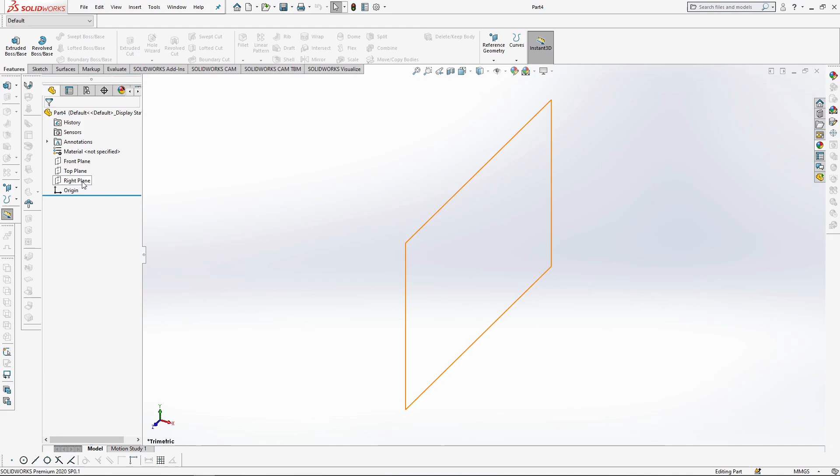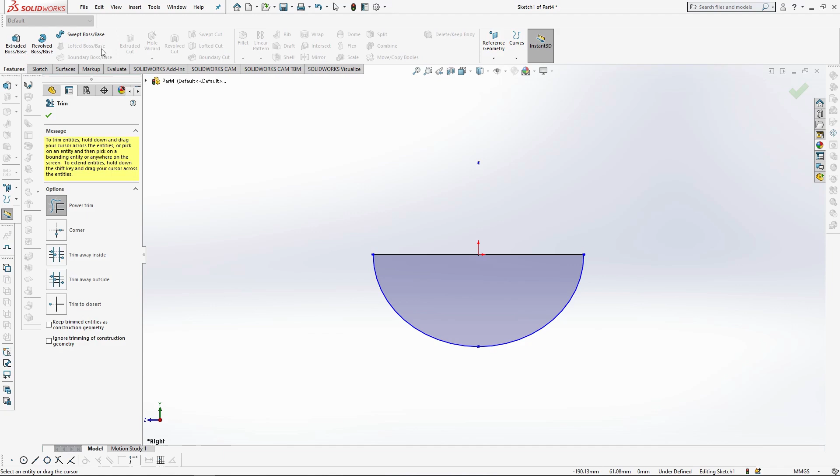To begin, start a new part. Sketching onto the right plane, use the ellipse and starting from the centre axis, draw a level ellipse. Make it wider than tall and change the dimensions to 60mm radius width and 52mm radius height. Half the ellipse horizontally with the line tool and trim away the other half with trim entities. Revolve the shape 360 degrees.

To start the leg, add a new plane off the front plane. Change the distance to 25mm and flip the direction. Flip the normal to here so that the plane faces outwards.

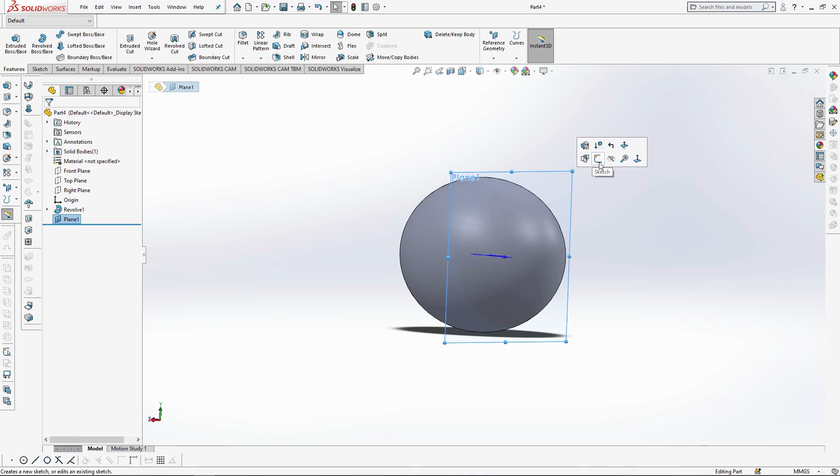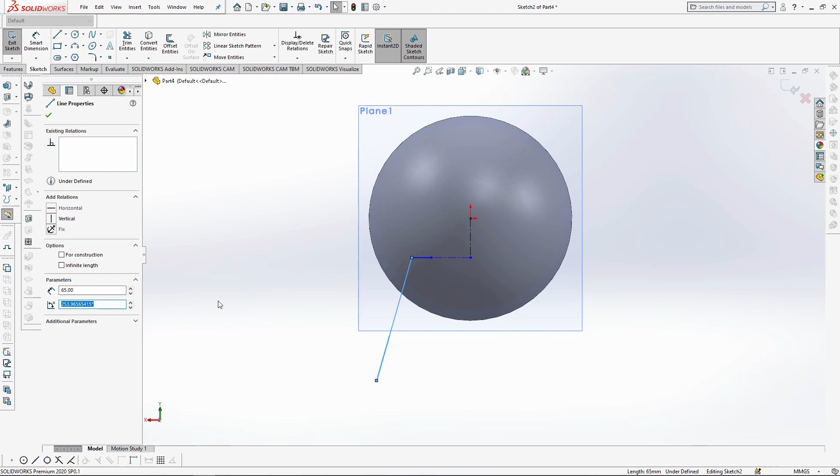Sketching onto the new plane, use the centre line to create some guides. Draw a line downwards from the axis by 20mm, then outwards here by 30. Using the line tool, draw a 10mm line back inwards along the guide. Then draw another line from the end of the guide, down and out diagonally by 65mm. Change the angle of the line to 255 degrees and close the sketch.

Select on the top plane, reference geometry and plane. Select this point from the sketch for the second reference and add a new plane.

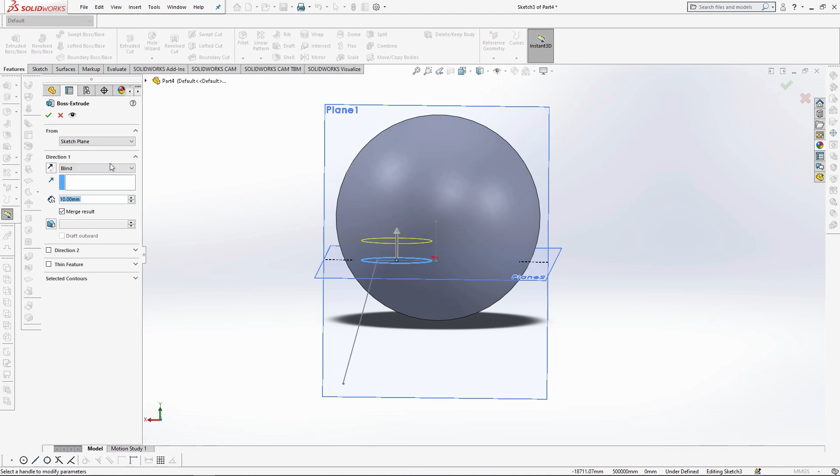Sketching onto the new plane, draw a 36mm circle from the end point of this line. Then use Boss-Extrude, change the extrude type to up to vertex and select the end point of the leg guide sketch. Select the diagonal line for the direction of the extrude. Before closing, untick Merge Result.

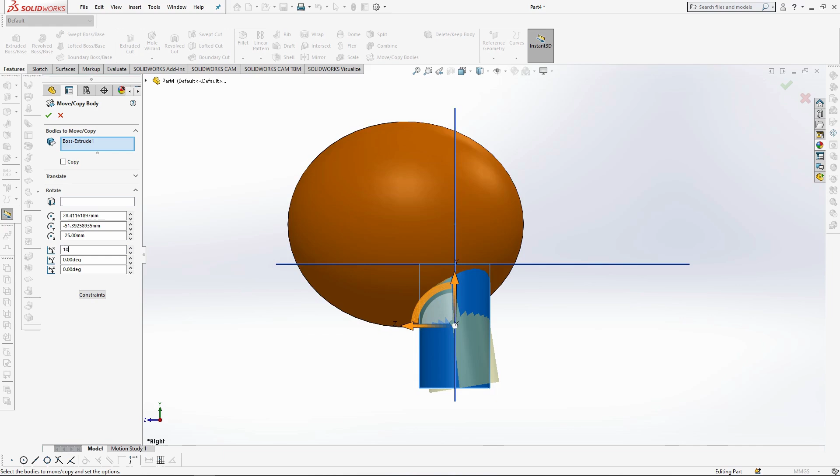Looking from the right side view, use Move/Copy Bodies. When the options open, untick the copy box and rotate the leg along the x-axis by 10 degrees, and OK it. Sketching onto the right plane, draw a rectangle from the highest point of the extruded leg here, across.

Extrude cut this away to make the leg level again. Then fillet the bottom edge by 4mm to soften it. Now you can mirror the leg using Mirror in Features.

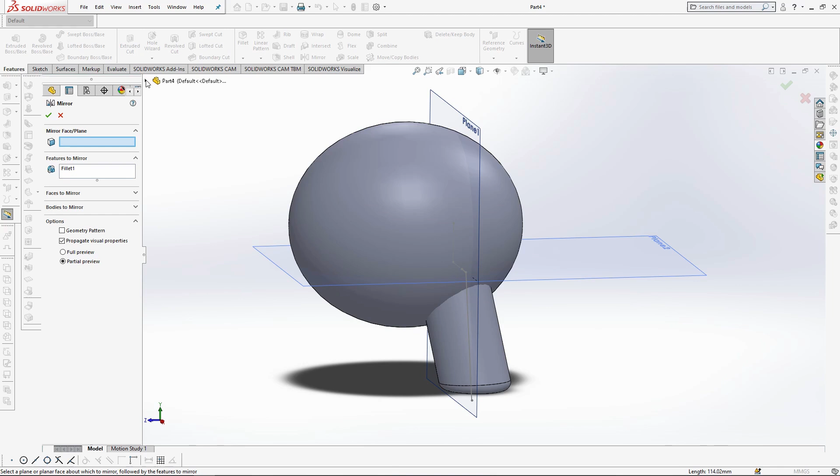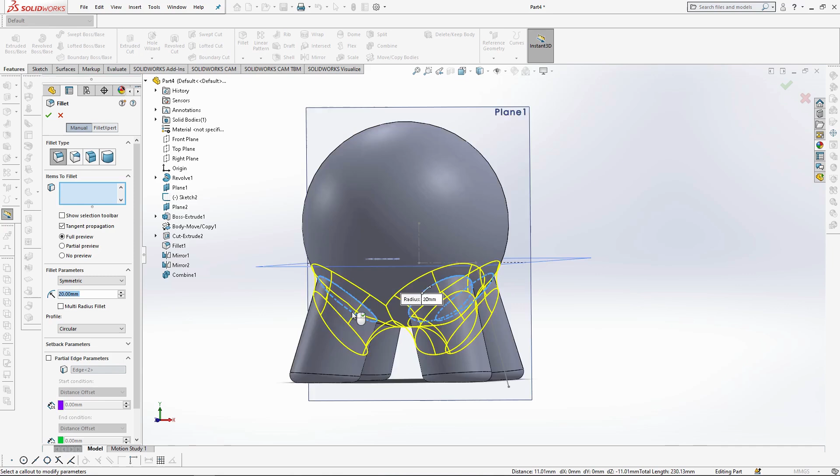Mirroring it from the front plane, ensuring to select the bodies under Bodies to Mirror, not Features. Then mirror both legs along the right plane so that you're left with 4. Using the Combine tool, ensure Operation Type is on Add and select all the bodies, combining them into one. Soften the join of the legs of the body, filleting all 4 edges by 20mm so it looks like this.

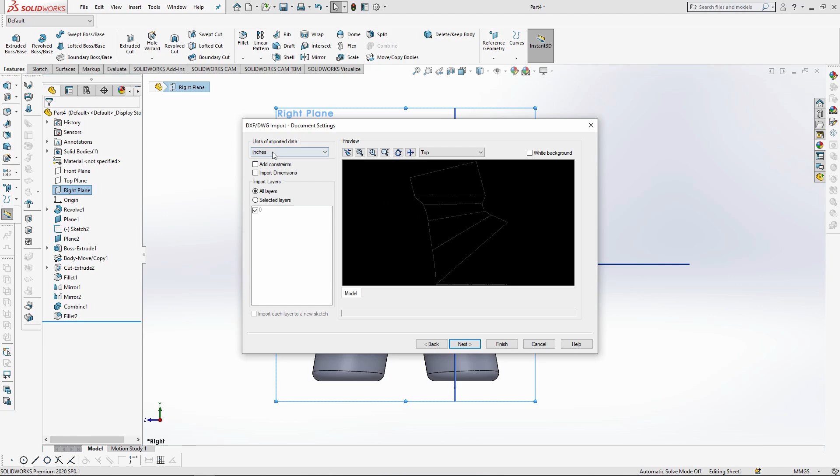To start the neck and the head of the piñata, select the right plane and go to Insert DXF/DWG, browse and open the Piñata Neck Guide DXF. When the options box opens, untick Import as Reference and click Next. Here you'll have a preview of the DXF. Change the dimensions to millimeters and click Finish to bring it in.

Using Move Entities, move the sketch from this end guide point to the centre axis and close the sketch.

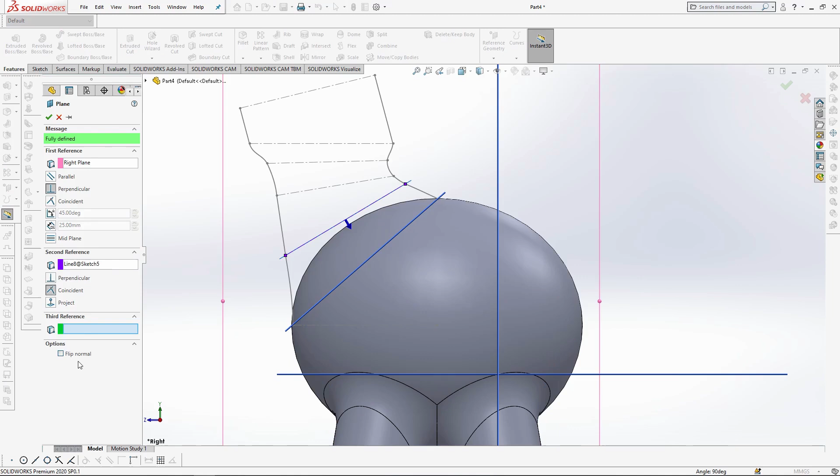With the sketch in place, I need to add 6 new planes at each guideline along the neck. To do this, select the right plane, reference geometry, plane, and select the first guide along the neck here. Ensure the plane is facing upwards to make it easier to sketch on later. Repeat the process for the 5 other planes, again ticking flip normal if the arrow is facing downwards. Don't forget to save your part as you go along, and hide planes 1 and 2.

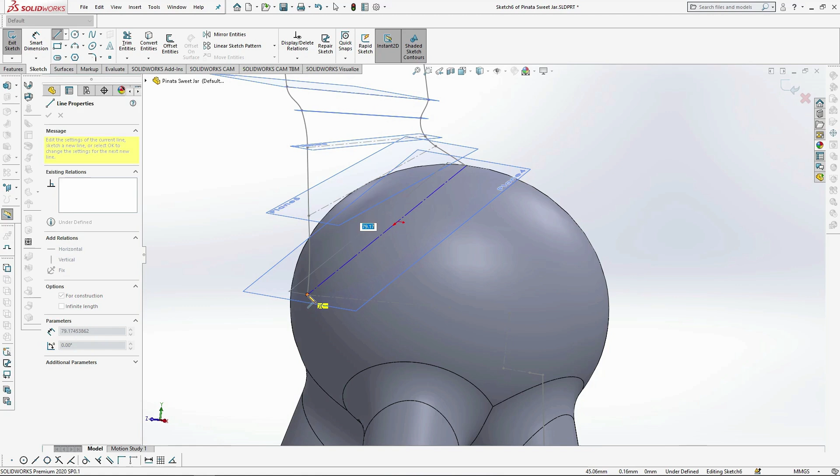Now to start the loft sketches. Start on plane 4 and use the centre line to trace over the guideline, ensuring that you hit the points either side. They must touch the neck guides. The points will highlight orange when you're on them, just like this.

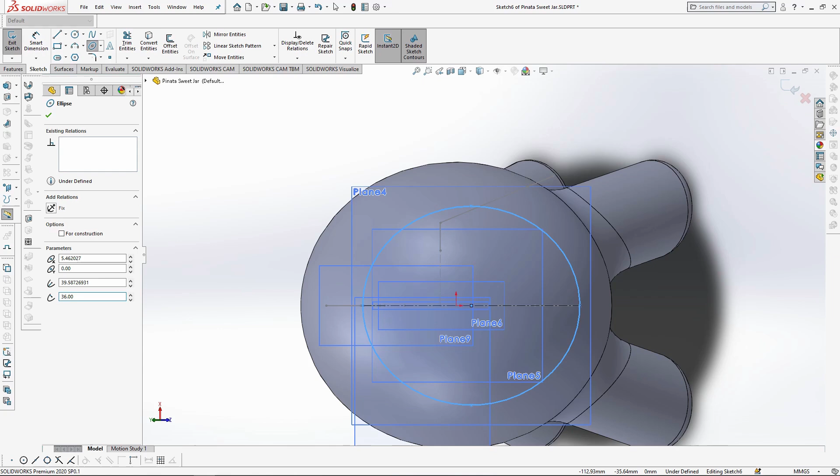Then using the ellipse, view the plane normal to, and start on the ellipse from the centre of the guide, click onto the end point of the guideline, then outwards. You can change the height radius dimension of the ellipse here to 36mm. The other dimension is fixed to the guide. Close this sketch and hide the plane.

Start a new sketch onto plane 5 and, like before, draw a guideline from point to point. Use the ellipse and, same as before, start from the centre of the guide, going along the line to the end point and outwards. Change the width radius dimension to 27mm and close it, hiding the plane.

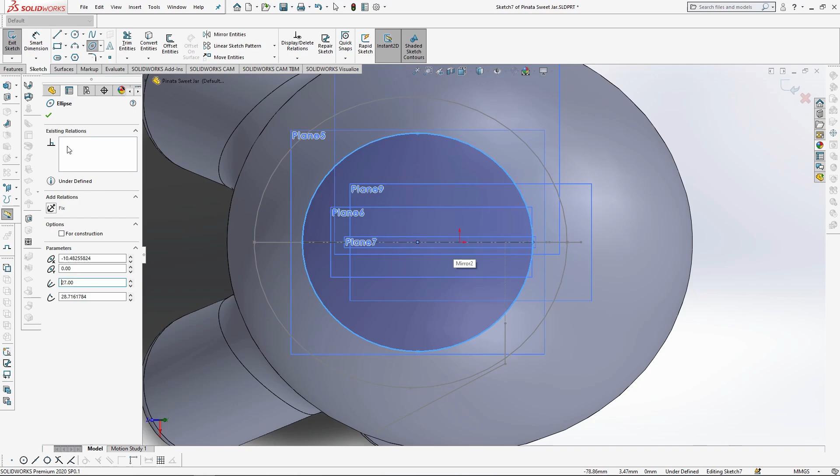This will make the model less messy and easier to see where you're up to.

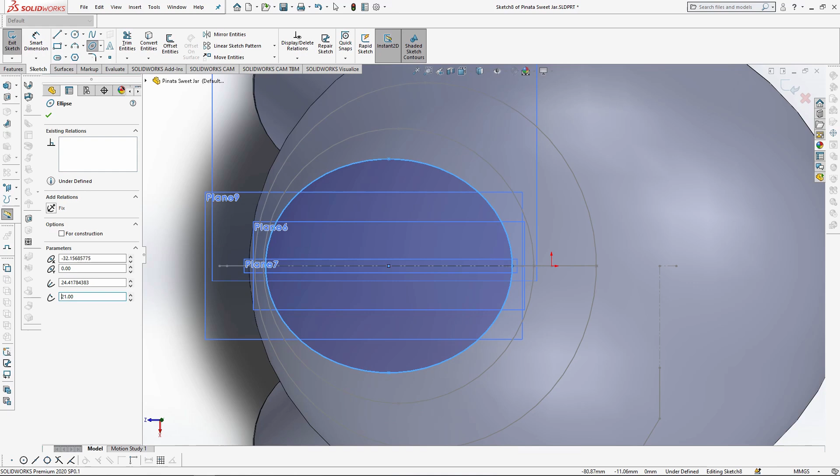Start a new sketch on plane 6, add the guideline and draw an ellipse again, changing the height radius dimension of the ellipse here to 21mm. Close the sketch and hide the plane.

For plane 7, draw a guideline again and draw another ellipse, changing the height radius of the ellipse to the same as below, to 21mm. Close this sketch and hide plane 7.

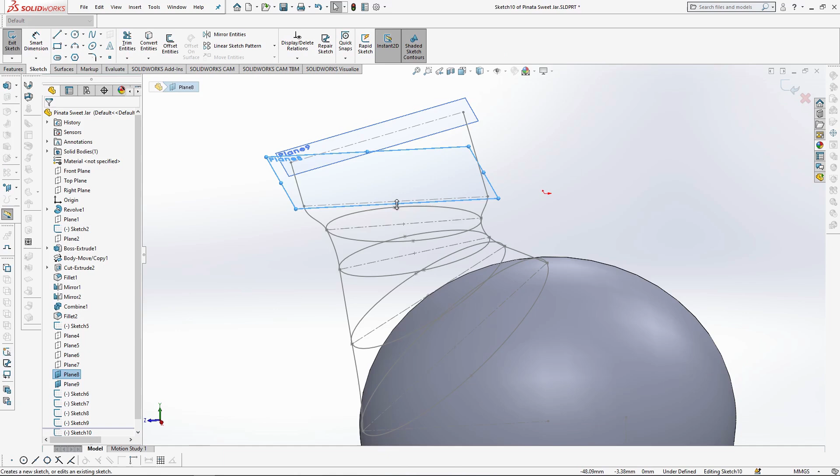Planes 8 and 9 are a little bit more complex, but they still require the centerline join. Sketching onto plane 8, draw the centerline from point to point, then draw another guideline from this point back along the guide by 25mm.

Use this point to draw a 50mm circle up to the end point. Half the circle like this with the line tool and trim away this side. Using the centerline again, starting from here, draw a 12mm line down, then horizontally outwards by 30mm.

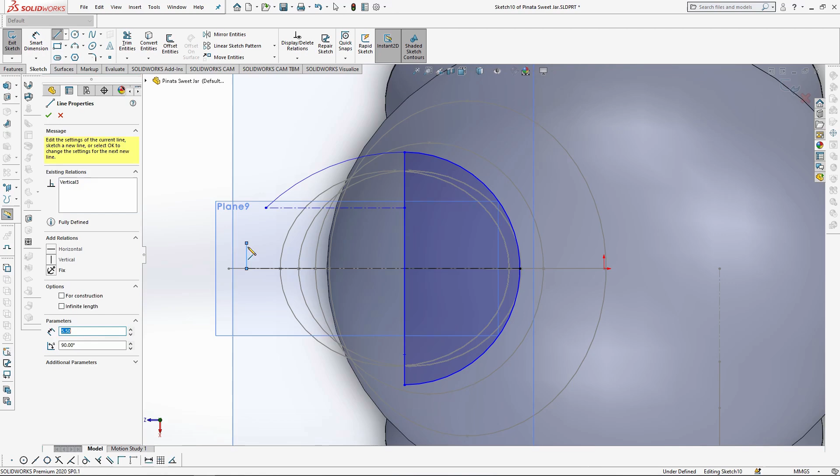Using the line tool, start from the top of the semicircle, hover over the point until the line turns into an arc like this, and join it to the end point of this guide. Next, starting from the end of the first guideline, draw a 5.5mm line vertically up, then join the lines together using the arc again. Mirror the three entities from the guideline, and trim away the inner entities.

Closing the sketch, hide plane 8.

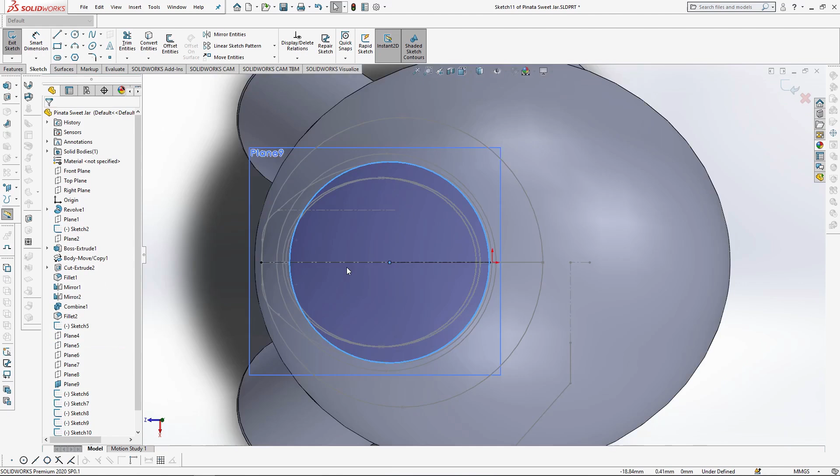For the final plane 9, repeat the same process as plane 8 with the centerline guide from one side to the other. Draw another guideline from this point back along the guide by 25mm. Use this point to draw a 50mm circle up to the end point, and like the previous sketch, half the circle with the line tool and trim away the side.

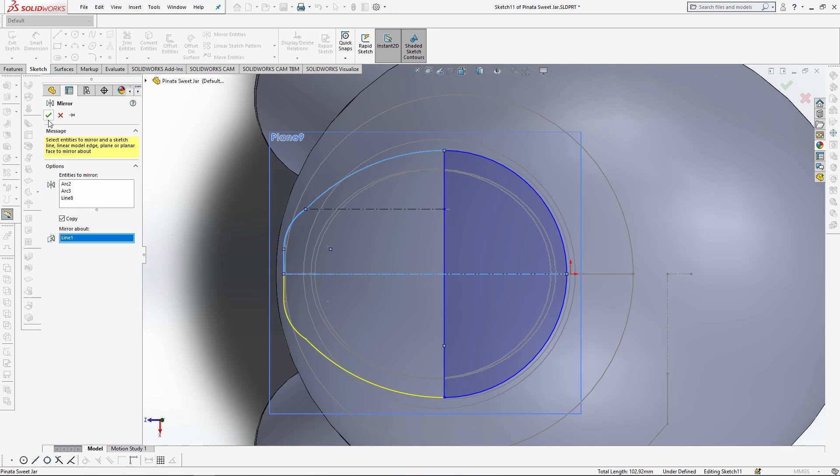Use the centre line, and starting from here, draw a 12mm line down, then horizontally outward, this time by 28mm. Use the line tool to join up these two points with an arc. Next, starting from the end of the first guideline, draw a 5mm line vertically up, then join the lines together using the arc again. Mirror the three entities from the guideline, trim away the inner entities and close the sketch.

Hiding the last plane, the profiles are all ready for lofting.

Selecting the loft tool in Features, start by selecting all the profiles of the neck in order from the top profile to the end one.

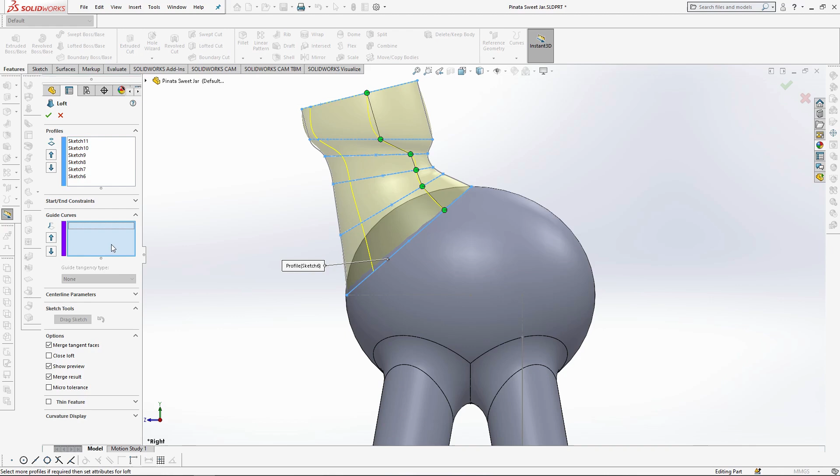Looking from the right side, you can see that the loft doesn't quite follow the outer profile I want for the neck. To fix this, I can use the original DXF sketch I brought in as guide curves for the loft to follow. Click into the guide curves box and select the lines along this side, and click on the green tick once they're all selected.

Then repeat the process on the other side, selecting all the curves, then the green tick. The neck preview should look like this. Before you OK the loft, ensure the merge result box is ticked.

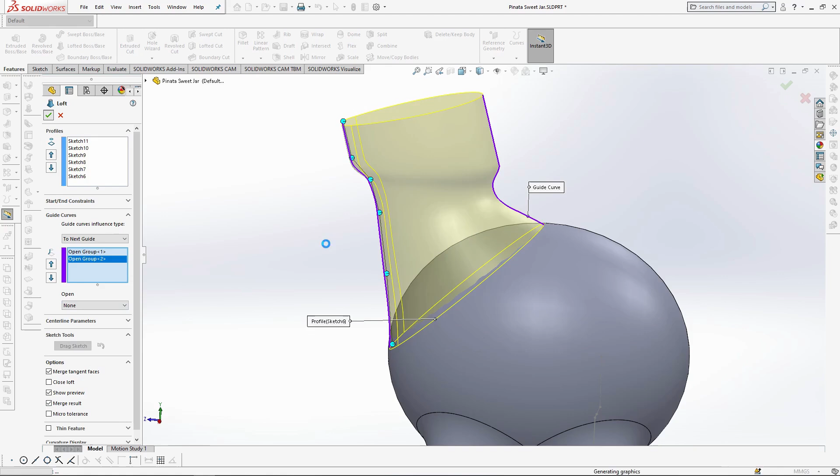I need to soften the join of the neck to the body, so just fillet the edge by 25mm, ensuring it goes all the way around the edge.

Now that I have the main body structure, I can add the ears. To begin, start a new sketch onto the top face of the neck. Looking normal to, convert the face to entities by selecting it to convert entities in sketch tools.

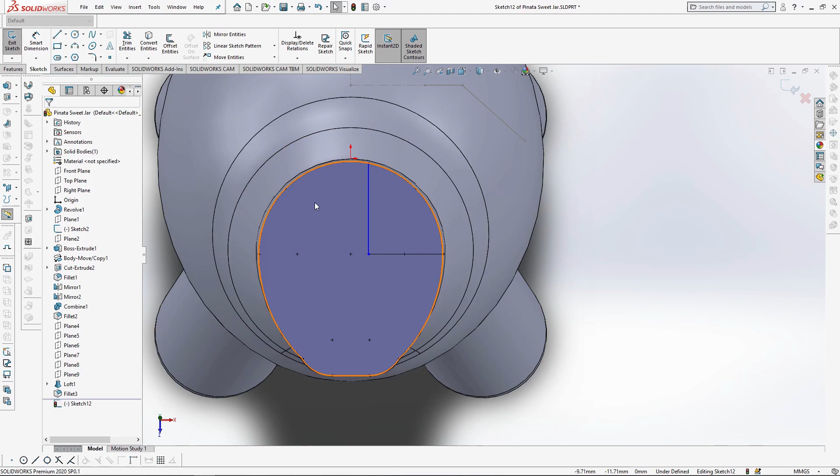Use the line tool to draw a 20mm vertical line from here upwards to the edge of the face. Trim away the excess sketch, and then selecting Sketch Fillet, change the fillet dimensions to 4mm, select the corner lines here. This sketch will form a bottom profile of the ear.

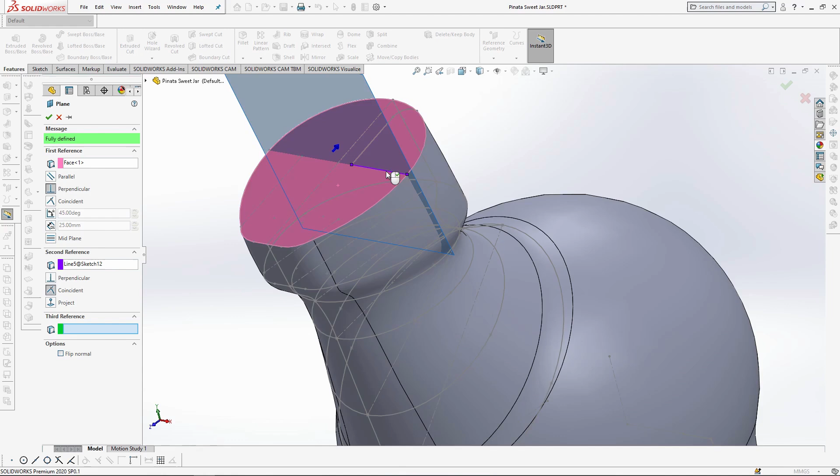Sketching onto the new plane, I'm going to draw the front profile of the ear. View the plane normal to, so that you're looking at the piñata from the front. Use the line tool to draw a 20mm line across the previous sketch, ensuring it joins up to both points.

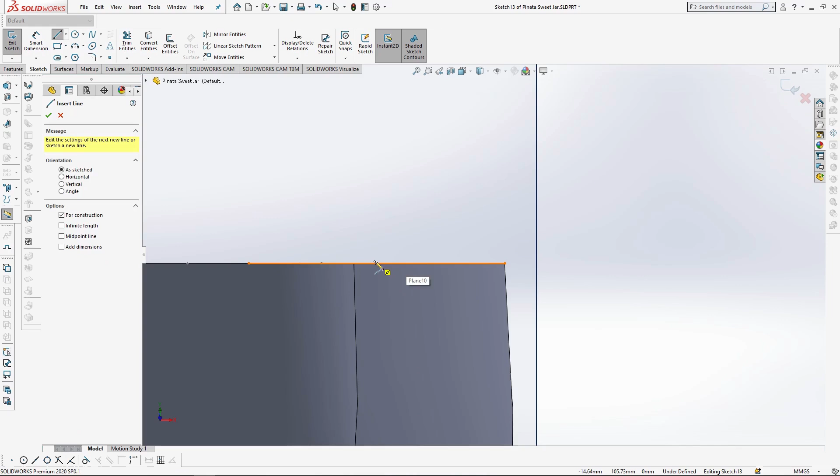This is important for the boundary boss. Use the centre line to draw a guide up from the middle of the line by 32mm. Then draw an 8mm circle near the sketch, and use Move Entities to join the top point of the circle to the top of the guideline.

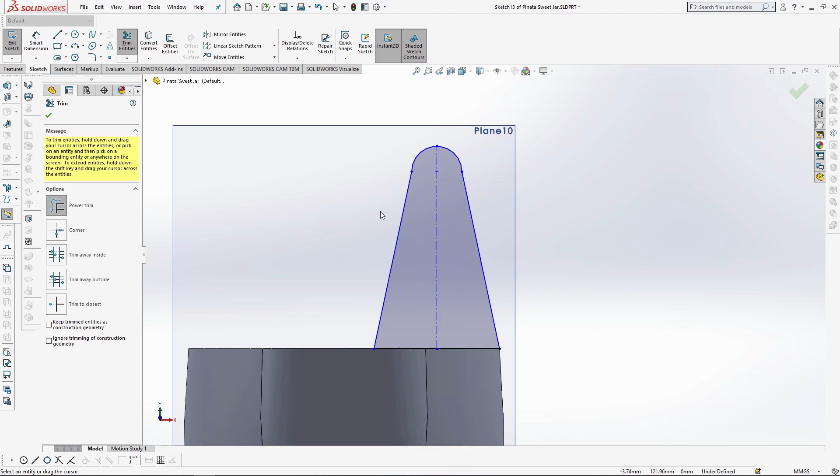Join the bottom line and the circle side points with the line tool on both sides, and trim away the inner entities until it forms a shaded closed sketch like this. Close the sketch and hide the plane.

To join up the two sketches and create a guide curve for a boundary feature, I'm using 3D Sketch, found in the Sketch drop down here. Then using a spline, join up the top point of the circle to the midpoint of the fillet.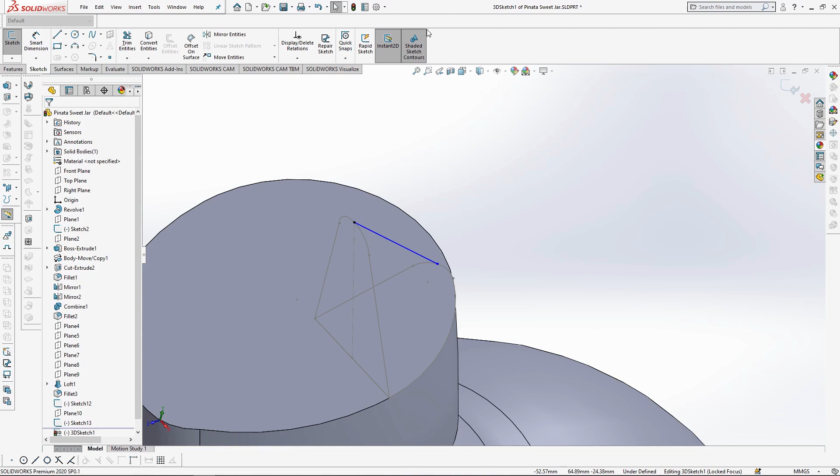To curve the spline for the side shape of the ear, view the part from the side. Click onto the spline so that the handles appear, and select the end point of the top spline handle to drag the spline up, while the other handle stays parallel to the side of the piñata head.

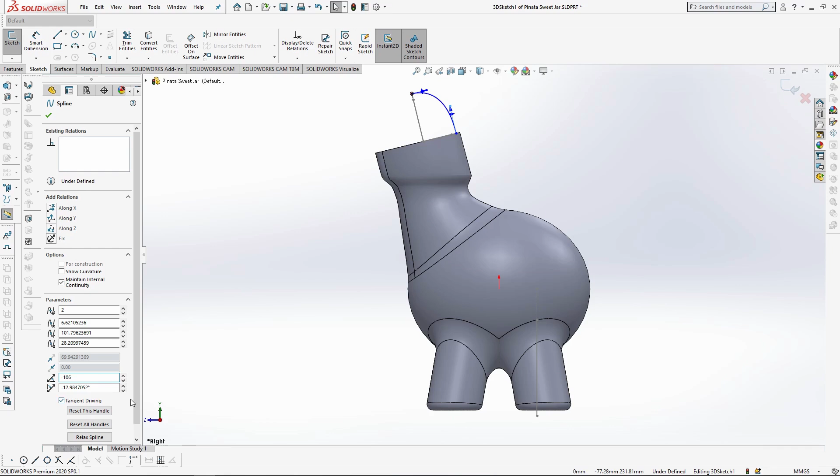To make it more accurate, you can input the spline angles here. For the top handle, change the tangent polar direction to 70 degrees and the tangent radial direction to 137 degrees. For the second handle, change the radial direction to 106 degrees and the polar direction to 13 degrees. This forms the curve that the boundary will follow to create the ear.

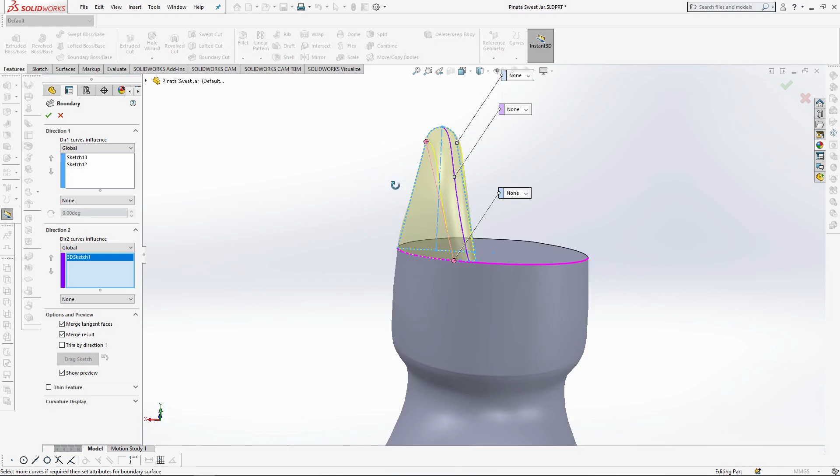Select Boundary Boss from Features, and for the first box, select the front and bottom ear profiles. Then click into the Direction 2 Curves box and select the 3D sketch. The preview should snap along the guide like this, creating the ear shape. Before I OK the feature, untick the Merge Result box.

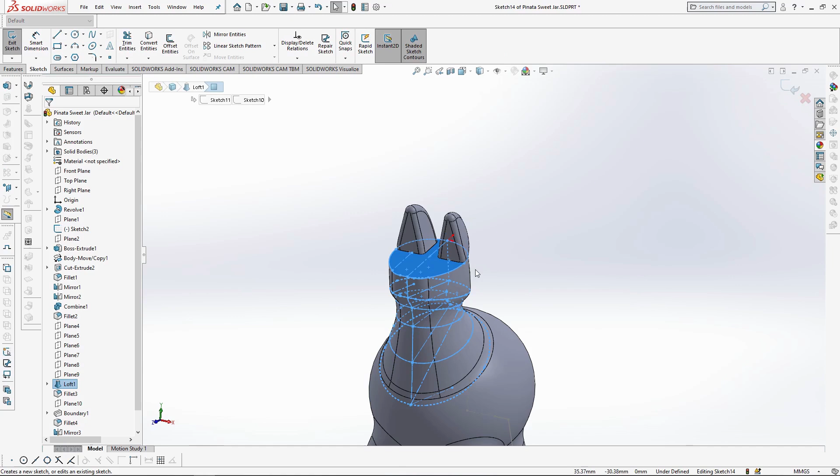Fillet the front edges of the ear by 3mm. With the ear finished, mirror the body across the right plane. To finish the piñata head, select and start a new sketch on the top face. Convert the entities of the face and extrude the sketch by 8mm, unmerging the result.

Fillet the top face of the extrusion by 8mm, creating the top of the piñata head. Use Combine again, with operation set to Add, to combine all the bodies as one.

Finally, to create the piñata tail, I need a new plane off the front plane, 40mm away, with the direction flipped towards the back of the piñata. Also tick Flip Normal to change the normal direction of the plane.

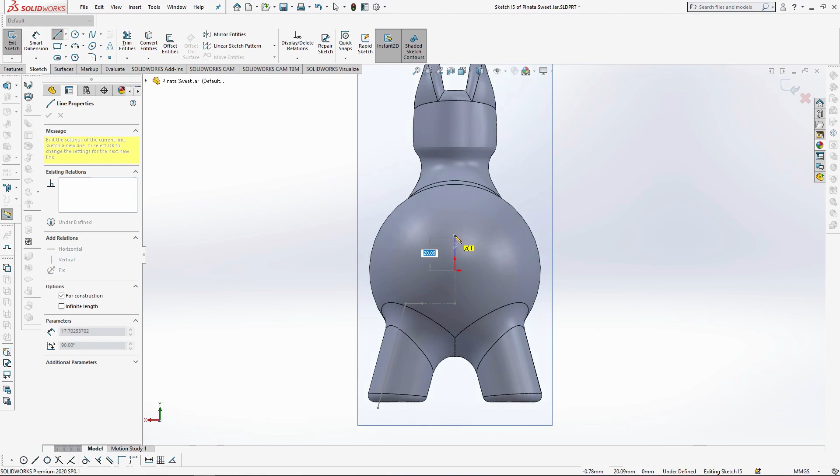Sketching onto the new plane, draw a centerline guide 30mm from the axis. Use the end point to draw a 12mm circle and extrude this sketch by 70mm, unticking Merge Result, and add a 2-degree draft angle going outwards.

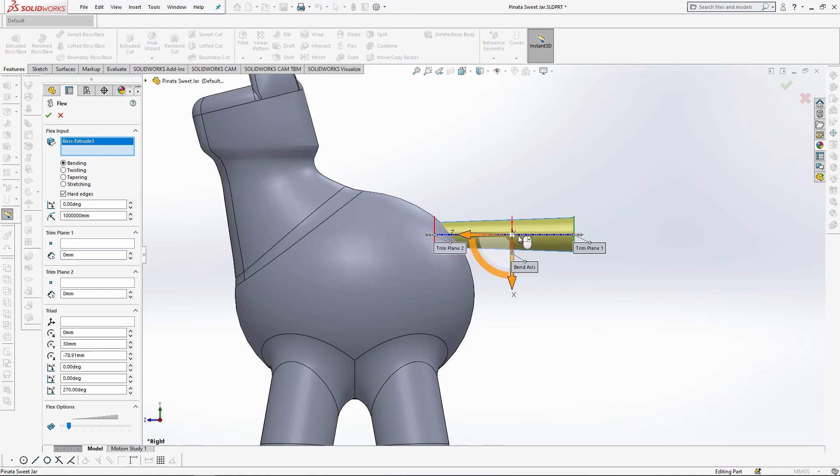OK the feature and hide the plane and any guide sketches still visible. To bend the extrusion, select the Flex feature, then the Tail extrusion. I need to move the triad up to Trim Plane 2 so that the extrusion start face stays straight.

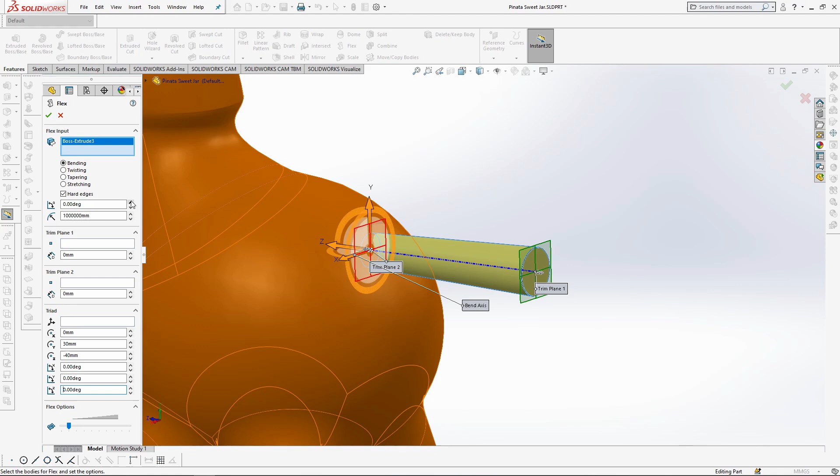Show the Flex type is on bending. To move the triad, change the triad origin to -40 on the Z-axis; it will snap to the end like this. To ensure the tail bends downwards, I need to change the triad Z angle to 0 so that the tail can bend this way. Change the bending angle dimension to 105 degrees and OK the feature.

Fillet the end of the tail by 4mm. To fill out the tail, I'm going to use Move/Copy Bodies to create copies of the tail part. Viewing the tail from the back, select Move/Copy Bodies, select the tail and check the copy box.

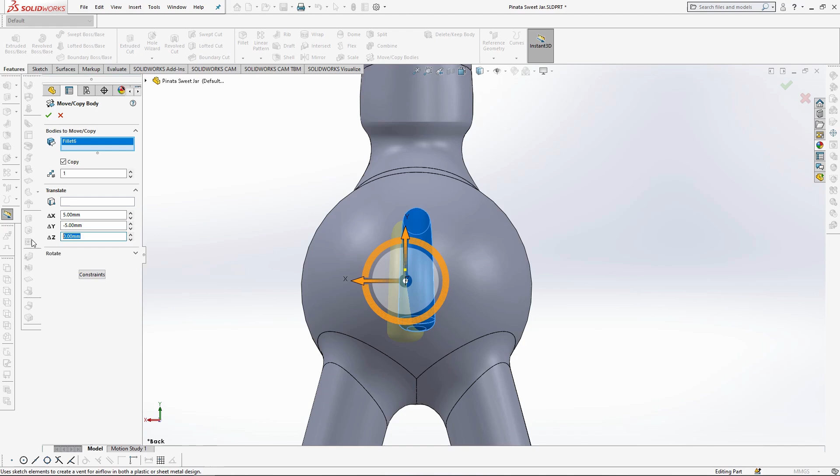Under Translate, change the X value to 5, the Y to -5 and the Z to 10. To rotate the tail a little, select Move/Copy Bodies again, select the copy and untick the copy box. Under the Rotate options, change the Y angle value to 340 degrees and OK it.

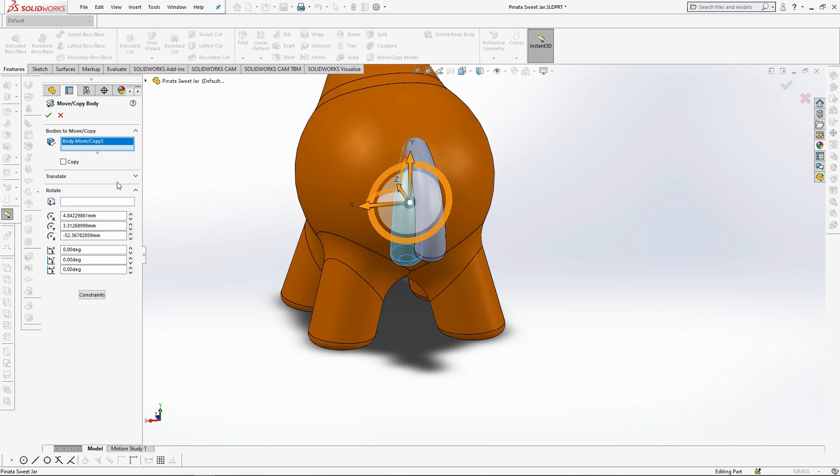Using Move/Copy Bodies, select the copied part and with Copy ticked, change the Translate dimensions to 0 for X, -4 for Y and 8 for Z. OK the copy and use Move/Copy Bodies to rotate the same part, again unticking copy, and changing the Rotate Y angle dimension to 335 degrees.

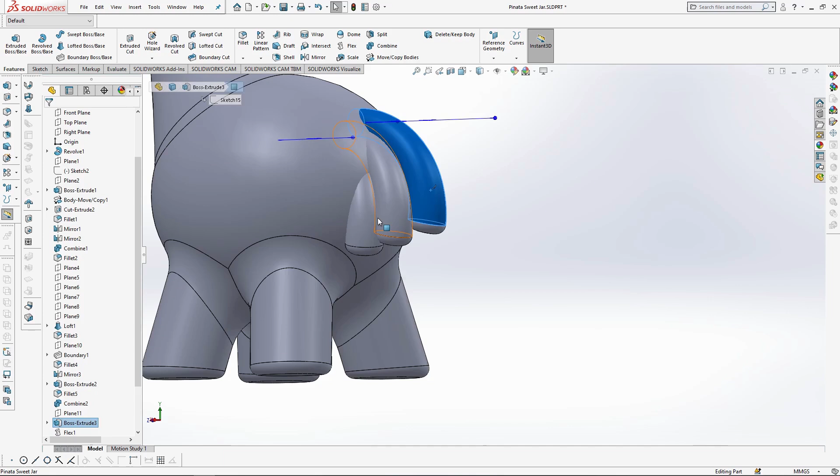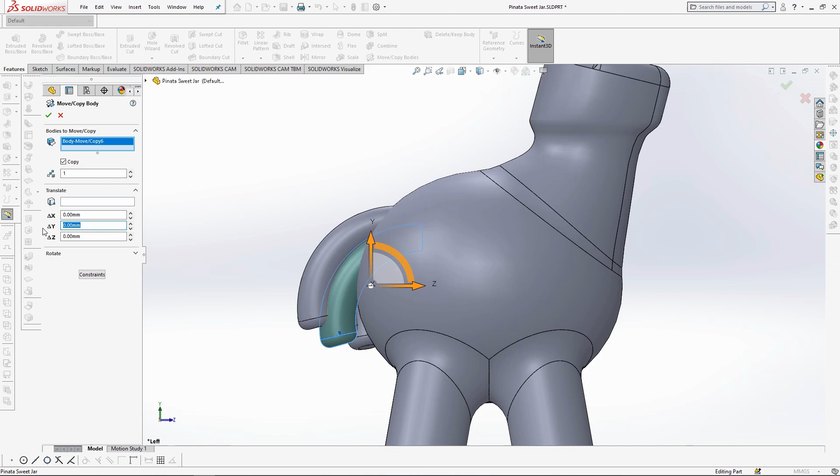To fill in the gap in the tail here, I'm going to copy the first tail body again, moving and copying the part 0mm along the X-axis, -8 for Y and 10mm for Z. Finally, move and copy the previous tail body, changing the Translate dimensions to 0 for the X-axis, -6 for Y and 8 for Z.

Selecting the right plane, mirror the two rotated tail bodies here. With the tail finished and filled out, combine and add all the bodies together with the piñata body. Use the Fillet tool to smooth all the remaining edges of the tail by 3mm.

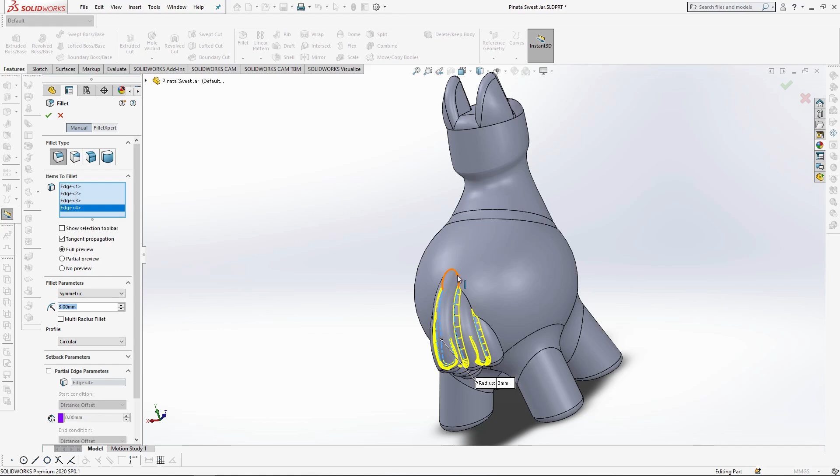You may need to do this in stages. I filleted the upper joint edges first, then the side edges, followed by the middle tail joints.

Ensure all edges are filleted to look like this to avoid issues shelling the part later. With the main model of the piñata sweet jar finished, watch part 2 to see how the part is split into 2 parts, shelled, and decals are added.